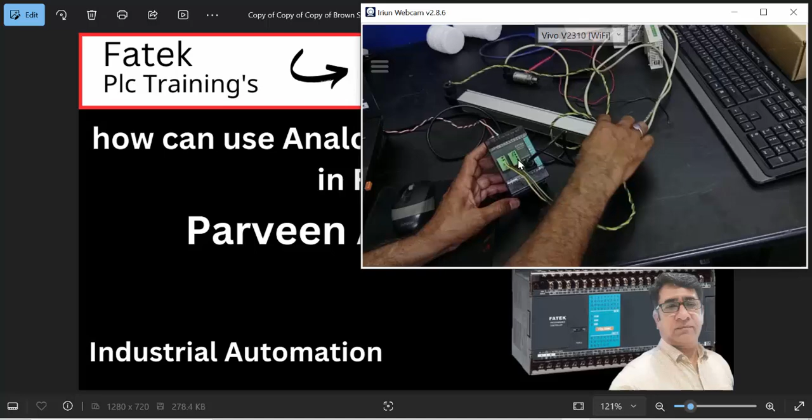This is the PLC and this is one analog input. This is the analog output and this is the analog input. I will give some voltage from this analog output, because this linear has a voltage rating of just 12 volt. So we give the voltage to the linear from this analog output and we read the voltage of the linear at this analog input.

So I am using channel 2. This is the yellow wire you can see. This is the input of this linear and this is the ground. This red color is the ground wire. Basically this is a little wrong, but this hardware is already connected, and this is the plus voltage. This is the green wire as shown. So let's go to the software.

WinProladder software you have to open, and here we will just take the backup of our PLC, whichever program is inside the PLC will be backed up. PLC is in stop condition. We will put it in run condition, and after that we can see our program. This program I showed you in a previous video, this is about the VFD control we made.

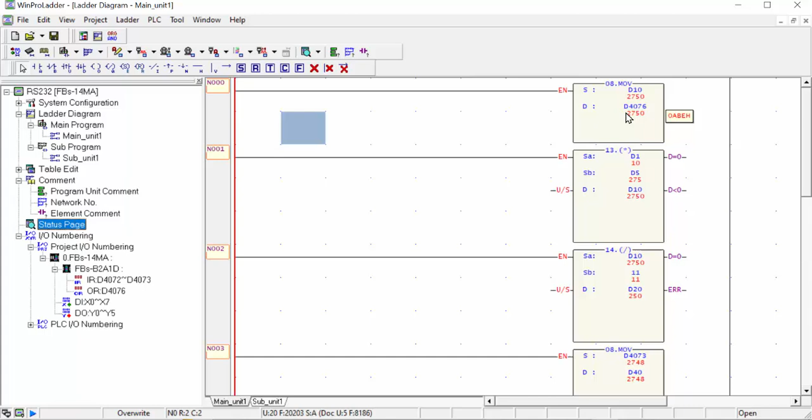This D4076 is the output data register. This I will show you in 1 minute. IO numbering, and you can see it here. FBs-B2A1D, which is connected with our PLC, and these are the data registers of our PLC. IR means input register, D4072 and D4073, and one output register D4076. So we are using this D4076 just for the voltage of our linear.

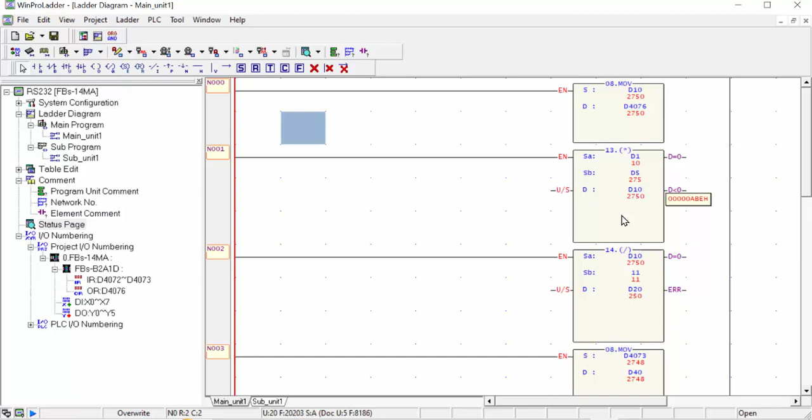This D1 we multiply by this value, basically 275, for the drive voltage 0 to 10 volt, but now we are using it for the linear. So this is 2750. Now bits are generating to this linear. This minimum, I think, looks like 3 volts. And after this, the multiplication and division command we used for the drive, but now we are using it for the output voltage. This is 2748 bits at our linear.

So what we will do, this is 4073, you can see it here. This is the second data register, and this is 4073, you can see we are using the second channel. The first channel is D4072, and the second channel we are using is 4073. So I will show you first how this linear value works. When we move this linear, this value will be changed.

See, now our linear is totally full. You can use it both ways, in opening condition or in closing condition. You can see our linear is now completely opened, and when it's fully opened it will go to 0. You can see this is now 300, 400. Now our linear is full open, meaning it is at 0. And as we move back our linear, you can see this is the full length.

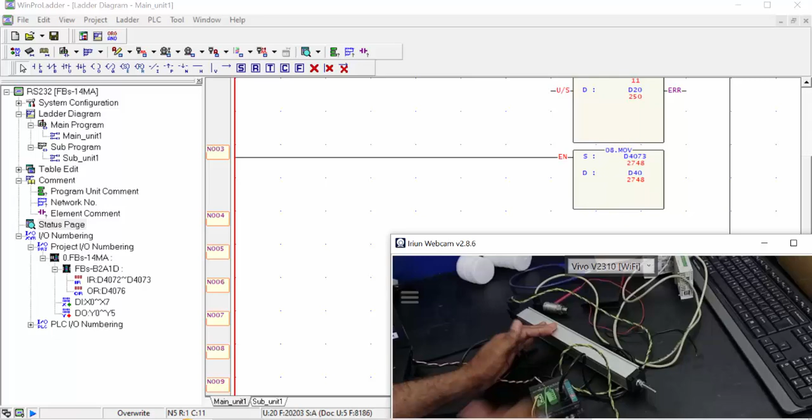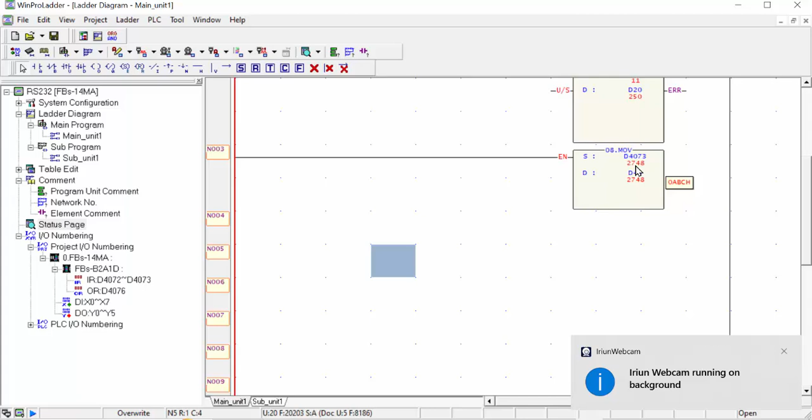And how can we use this linear in the program? For example, you are using it on any machine where you'd like length counting. This linear is basically 1 meter length, for example, or 1 feet, or inch, or centimeter. For example, we think of it as 100. So how can we use 100 in the program? This is D4073. The total bits are 2748 for 100, and which formula will we use? We will use it here.

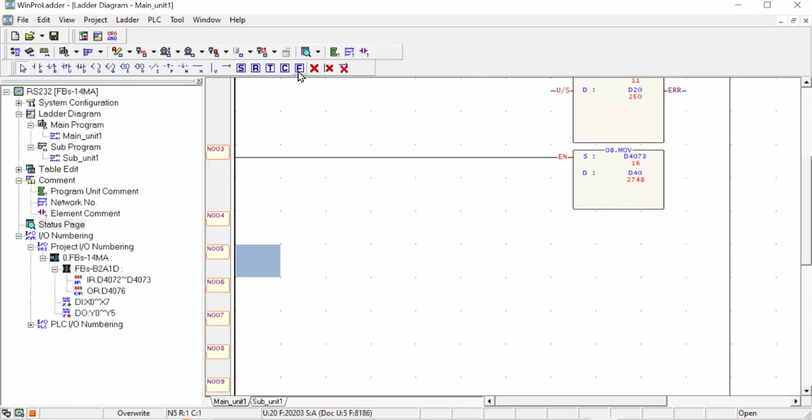Stop the PLC first, and here we will use the compare command. Sorry, first we will use the division command. When you write DIV, you can use the division command, and here we can write 2748, which is our total bits.

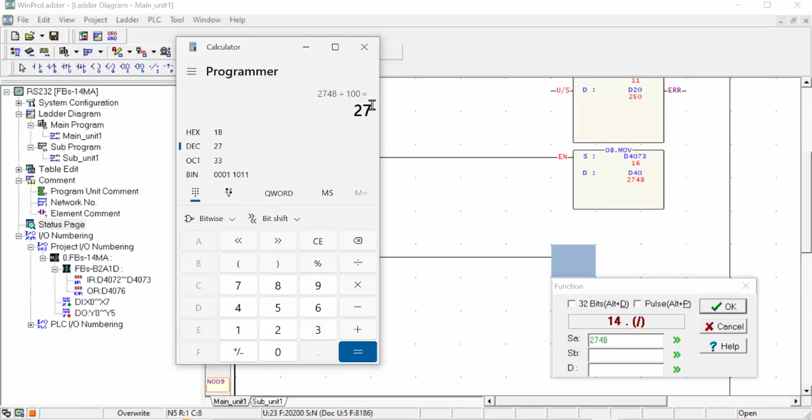And how much we have to divide by 100? We can go to the calculator, and here this total bits, 2748 bits, you can divide by 100, and the answer coming is 27. 27 is equal with your 1, and you will write it here 27, and after take any data register, for example D300, we will choose and click OK, and this will show your original length.

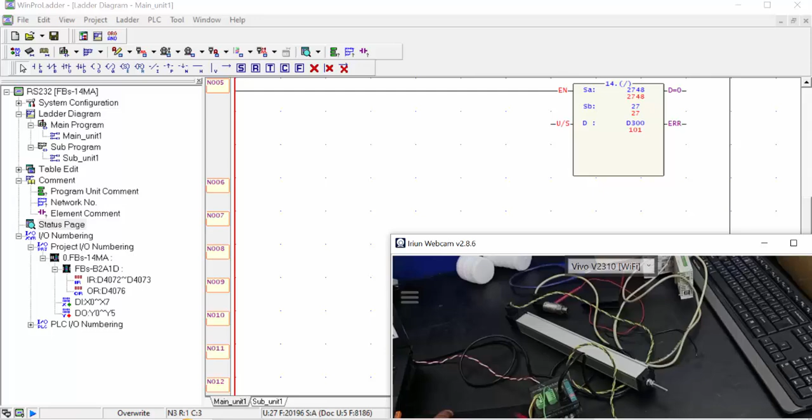So we download the program to the PLC, and again we will check. Now you see this is our 100 exactly showing, because this is totally in stop condition. I will show you my camera, and here you can see this. We will take it up a little. Here we will take, and now we will take it upside. See, as I move my linear, your value will be changed. Sorry, what's the problem.

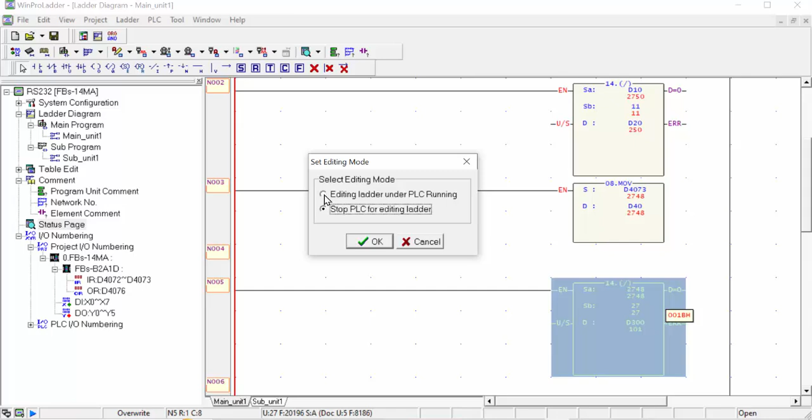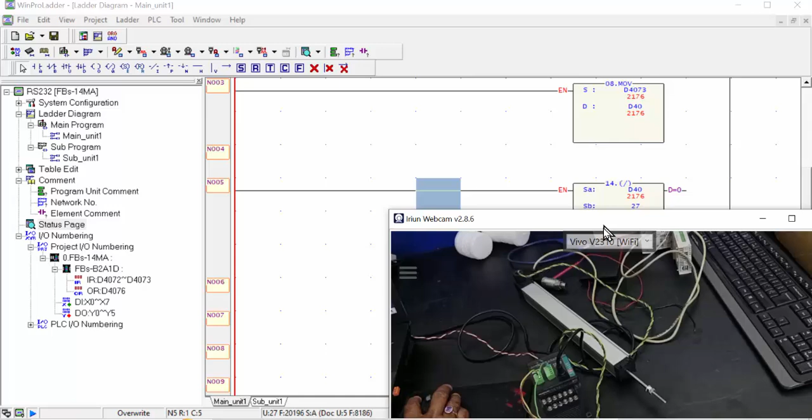See, now our original is running. This is when completely opened. In camera I will show you. Here we will take this camera, no problem. And you see, if we open our full linear, it will go to 0, right? 39, 37, 36, 34. Now if you put back, it will go to 100 mm. So this is how it can be used in the program. Now your original mm are running here.

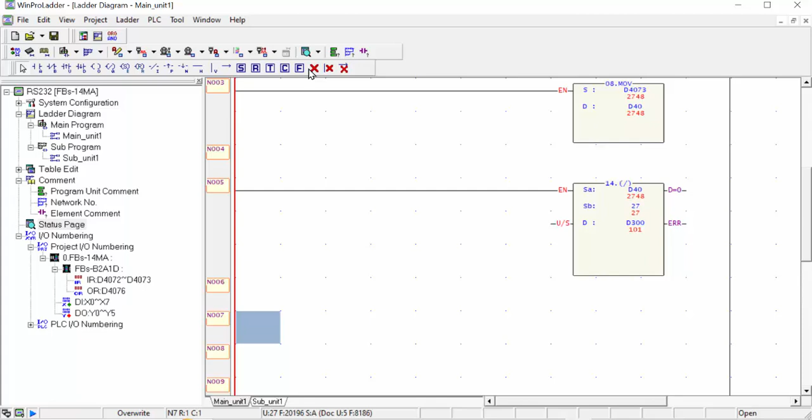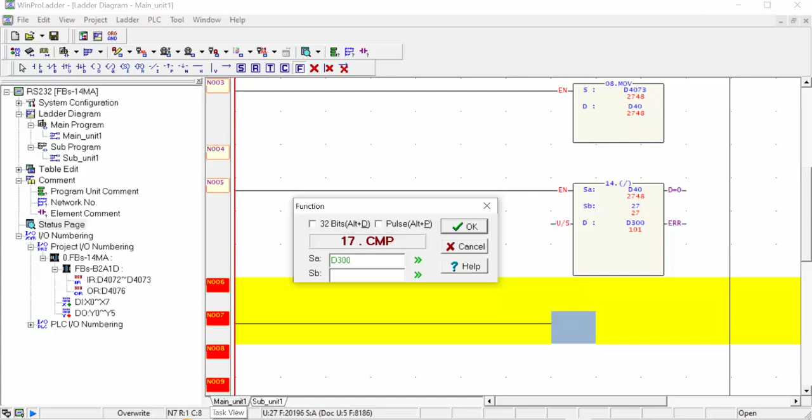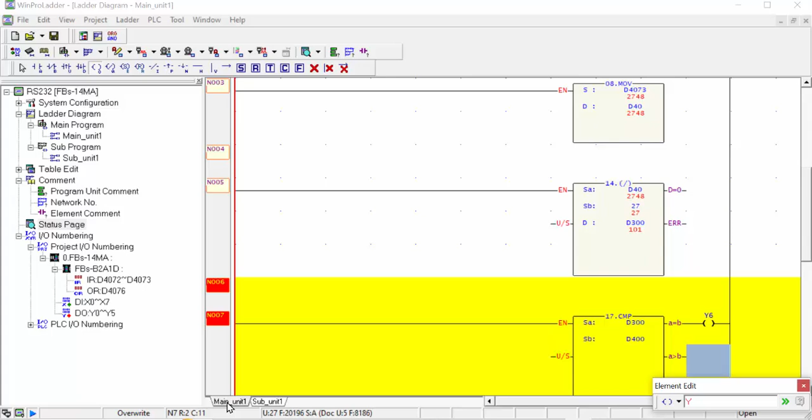And, for example, in previous videos I already explained the compare commands and how they can be used in the program. CMP, when you write comparison, here you can write for example value D300 when equal with D400 and click OK, and after you need any output, for example Y6, and here Y5, and download to the PLC.

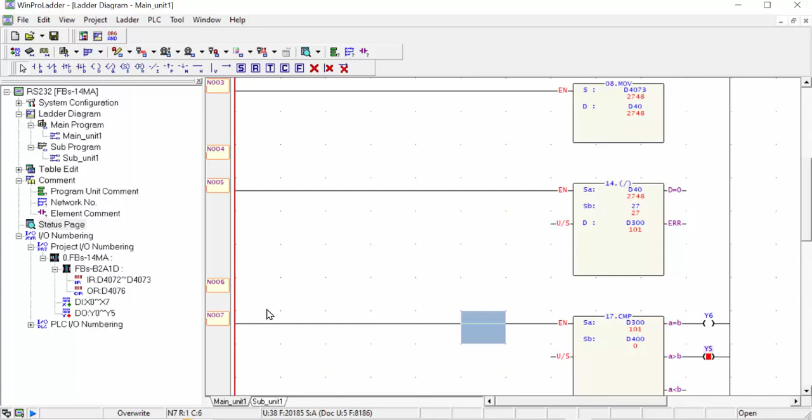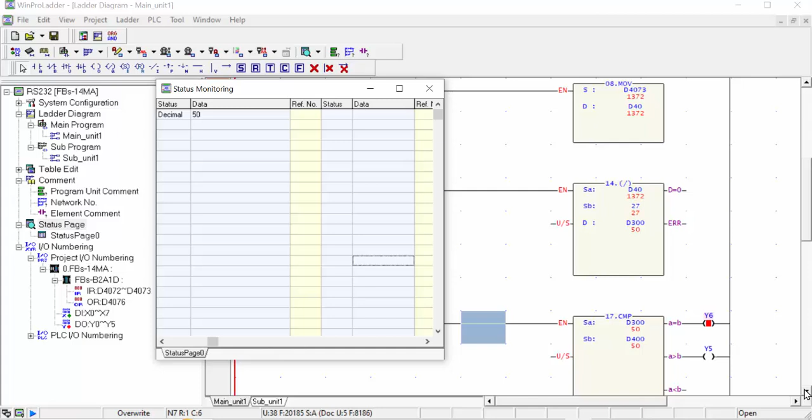And as you can see, now your value is 100 mm complete, your Y5 is on, but D400 you have to set the value. Go to the status page and here you have to set D400, for example I need 50 mm, after 50 mm I need to turn on and off my linear relay. 53, 52, 51, see, as 50 mm is completed, my relay will be on and off.

And in camera again I will show you. Now our 50 mm are completed, our Y6 is on, and as our value will be full at 100 mm, Y6 will be closed and Y5 will be on, and as your 50 mm is completed, your relay will be stopped. This Y5 is now closed. Your linear is working but your motor will be stopped because your Y6 is now off.

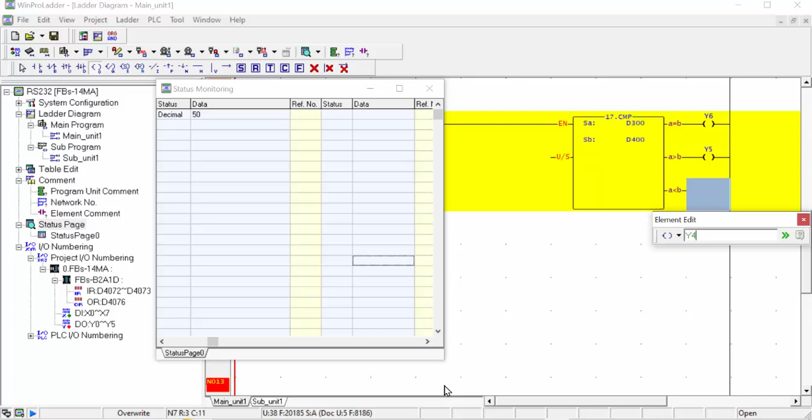You can see this is the compare command, also there are 3 commands: less than, equal, greater than. Also you can put here any other relay, Y4 or Y3, which you like to define in your hardware. That will also work. Now you can see at 50 your Y6 is on. I will put here one more, Y3 or Y4 we can put, no problem. Control W, and you can see now less than 50 your Y4 is on, equal to 50 your Y6 will be on, and when greater than 50 your Y5 will be on.

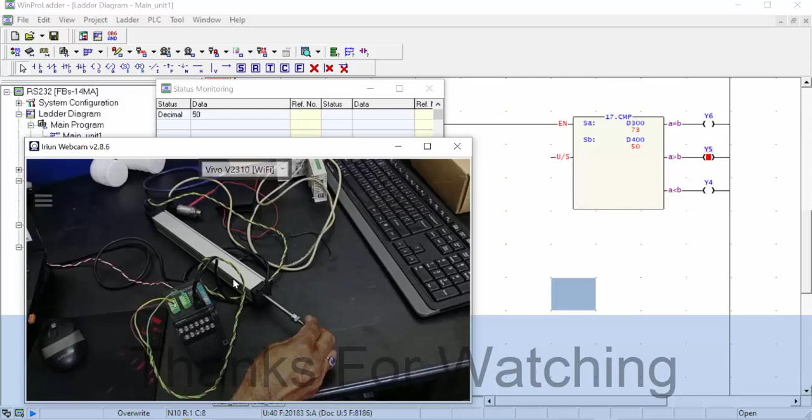So this way you can control the length of your machine. It's a very simple and easy method to control the length of any machine. I hope you understand this linear control.